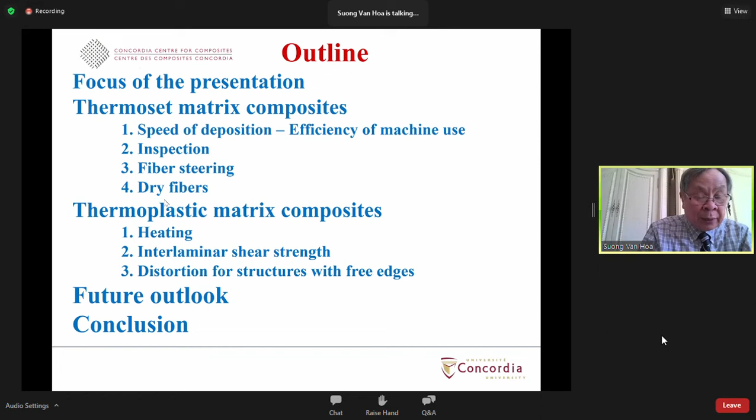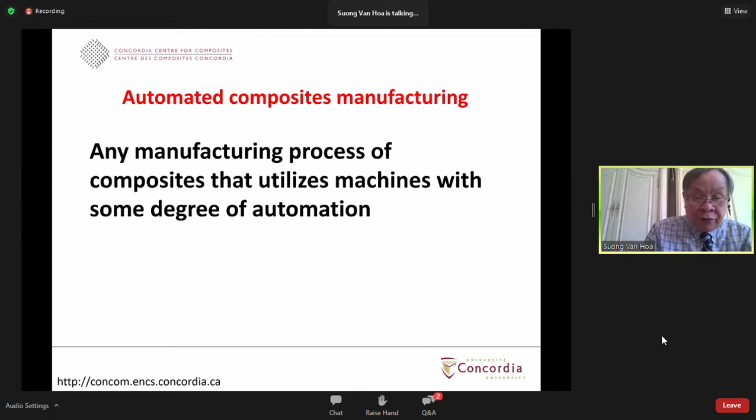So first is the focus of the presentation. To define the focus, what I need to do is define what it means by automated composite manufacturing. In my opinion, any manufacturing process that utilizes machines with some degree of automation can qualify as automated composite manufacturing. The reason I need to do this is because when organizing previous symposia on automated composite manufacturing, I had to decide which abstracts should be accepted, because some people claim they are doing automated composite manufacturing when they may not be. So with this definition, I think the field is very large.

So I want to qualify some aspects that I will not cover in this presentation. The first item is filament winding. I think filament winding is definitely an automated composite manufacturing process. It is an additive manufacturing process as well, and actually some of the AFP and ATL processes were based on filament winding. There's been a lot of literature and information on this technology, so I will not discuss it in detail today.

Another process that also qualifies as automated composite manufacturing is pultrusion. Pultrusion can be used to manufacture many components with uniform cross-section effectively and economically. Again, this technology has been around for many years and there's a lot of information about it, so I will not include this in detail today.

Another process that qualifies as automated composite manufacturing is thermostamping. Thermostamping is similar to compression molding, except the temperature of the panel may not be as high. People use this technique to make small components with complex geometries out of thermoplastic composite fairly well. But again, due to lack of time, I will not discuss this topic in detail today.

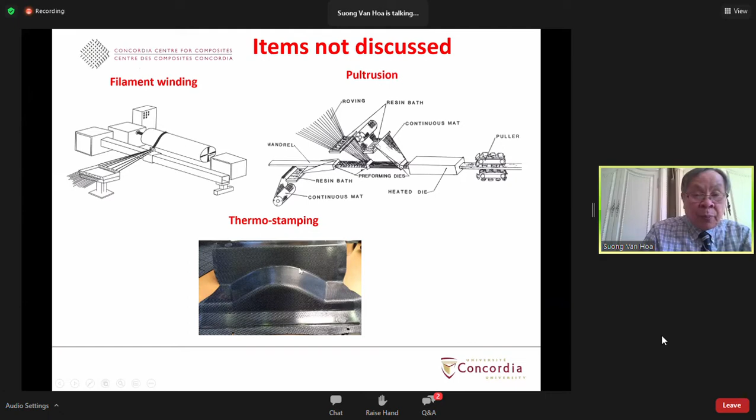Another topic of importance that qualifies as automated composite manufacturing is material handling, pick and place. I think the presentation by Sue Patrick earlier today mentioned quite a bit of this technique - some kind of robot with actuators, and at the end of the actuator you have some kind of suction cup. They use the suction cup with the actuator to place against some kind of prepreg or material and pick it up, transferring it from one table to another, such as from a layup table to a mold surface. This is useful to transfer prepreg, dry fibers, auxiliary materials, bagging material, etc. It's a very powerful technique for transferring materials. I don't have time to go over it in detail, but there's a review paper from 2018 that addressed this technology, so for people interested, you can take a look at that review paper.

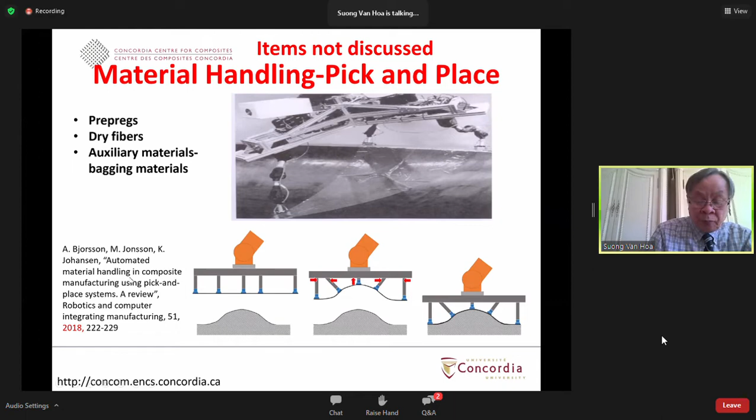So what will I focus on? I will focus on 2 technologies - ATL, automated tape layup, and automated tape placement or automated fiber placement, AFP. The reason I want to focus on this is because these are new technologies that have been used quite a lot in the aerospace industry to make many components for airplanes. Along this line, I will talk about 2 aspects, the 2 kinds of material these 2 processes handle.

One is thermoset matrix composite. For thermoset matrix composite, we have not done a lot of work at Concordia, so I may obtain information mainly from the literature for this particular aspect. The other is thermoplastic composite, where we have done some amount of work. I will talk more about our work on thermoplastic composite using AFP later on.

So the idea for the factory of the aircraft in the future. I show you two pictures. One on the left shows the conventional way of making aircraft components using composite, mainly by hand layup with a lot of people around. The other picture, on the right, shows an automotive application with a lot of robots. So we may think that in the future, the manufacturer of aircraft may look something like the case of the automobile. Maybe—we don't know yet.

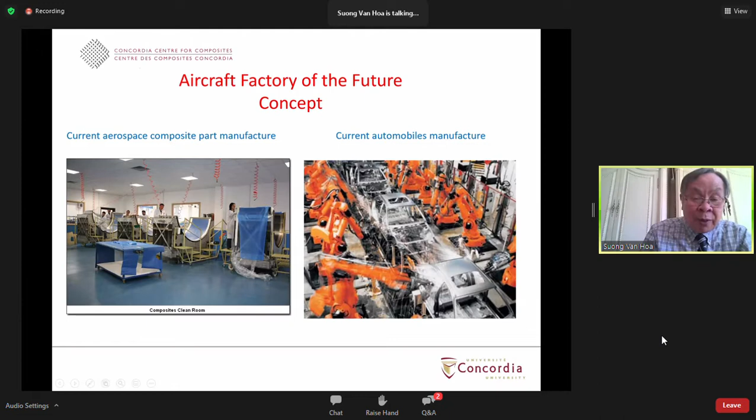But at the present time, in terms of how AFP and ATL are used, they're mainly used for making large, simple structures. The objective of automation for composite manufacturing is how to deposit materials at high speed with good accuracy and few defects. So three main items: high speed—you need to deposit a large amount of material within a certain time—precision, and few defects.

You can take a look here: this gantry is depositing this kind of laminate onto this kind of mold, and you can see this laminate is huge. You can compare it against the size of a person to see how huge that is. The reason for that is because in order to deposit material at high speed, you can mainly work on large parts and also limited geometry complexity.

So for this, I find that thermoset composite is more suitable for this kind of process than thermoplastic composite. I think there were a few questions in the previous presentation about thermoplastic composite—I feel that thermoset composite is more suitable, and I'll mention the reason for that a bit later on.

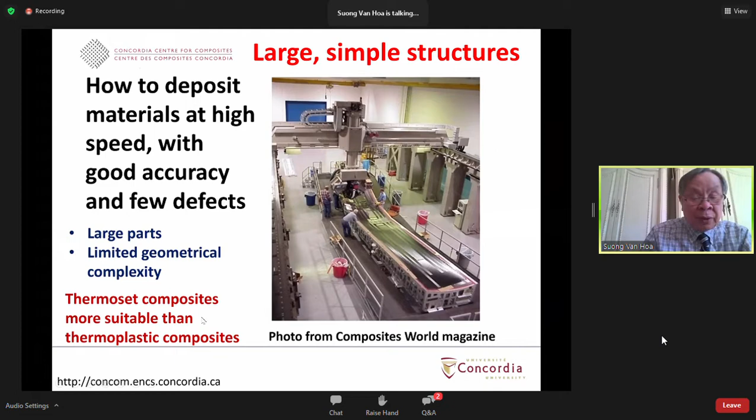Now we look into the use of automation for thermoset matrix composite. The main concern when we lay down the layers is for them to stick together—when you lay down a lot of prepregs, you need them to stick together. The temperature needed is not too high, maybe between 40 to 60 degrees centigrade, and the objective is mainly to make sure it's tacky, so it can stick together and become one single piece.

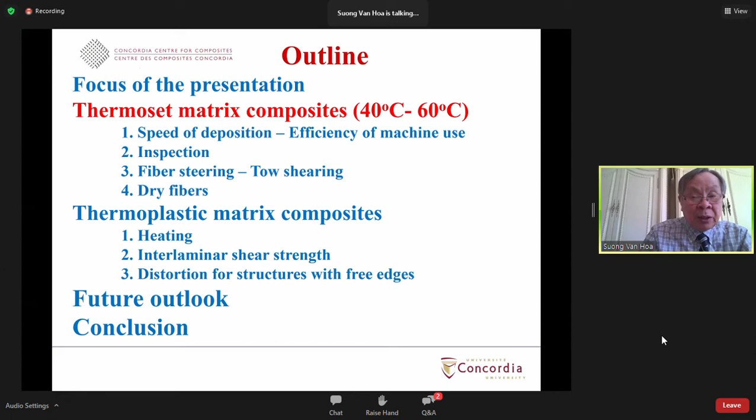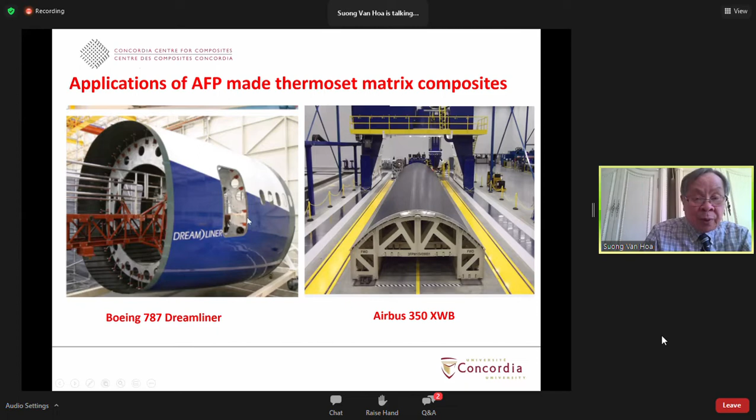Along this line, I think thermoset matrix composite has established a foothold to be accepted in the aerospace industry. Many major companies such as Boeing and Airbus have used automation to make many large structures. I'm sure everybody has seen these pictures of making the fuselage, either for the Boeing 787 or Airbus 350.

So what are the issues right now in terms of improving the use of automation for thermoset matrix composite? We're going to find there are a few aspects: the speed of deposition, efficiency of machine use, inspection, fiber steering, and dry fibers. First, the speed of deposition and effective machine use.

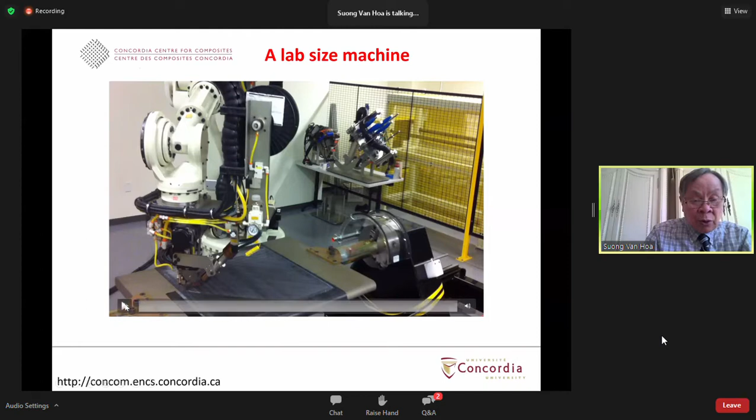First, I want to show you just a lab-scale machine. This is the lab-scale machine we have at Concordia. I'll show you quickly the kind of motion taking place. This is a lab-size machine, but there's a big difference compared to a production machine. I mentioned before that the production machine in real aircraft manufacturing is very large. So when we work with the lab-scale machine, we may not see issues that people in the production area may see, because there the objective is to deposit things very quickly.

There are many items that people spend time studying. Basically, they do some kind of time-motion analysis of the machine, to see what aspects take a certain amount of time. So one aspect is loading the tow—if you have a machine with 32 heads, you spend time loading the tows on, so that takes some time. The next aspect is the different modes of material deposition.

During the time you deposit the material, it depends on whether you have a continuous course, where the machine runs at high speed, called the mid-course payout. Or you have some location where you have to slow down, add or cut the tows, or you have a small piece with a gap.

Another motion here is called the off-part motion. That means the machine has to go back from the beginning to lay down again, so it gets off away from the surface of the part. So that's an off-part motion.

Another activity of the machine is called reliability recovery. During the deposition process, there are many issues like splicing the tow ends - when you're at the end of a creel of fiber, you have to connect the two ends together, spending time to splice them. Or if the tows are broken, twisted, or sticking to the roller, you again have to spend time to repair it.

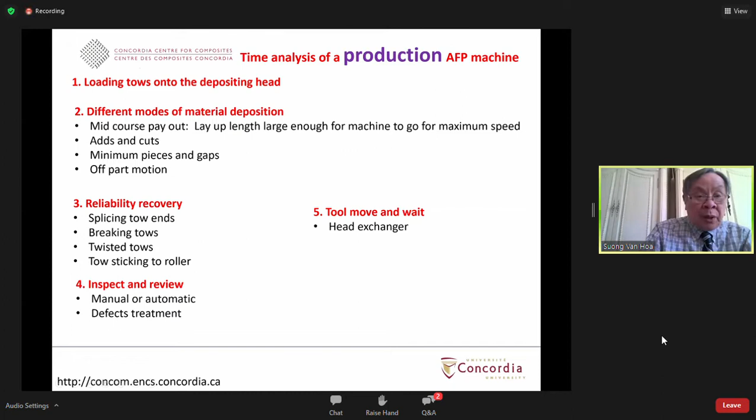There was a paper in 2019 from people at Electroimpact Company, and they make a statement I find kind of provocative: AFP machines in aerospace manufacturing spend much of their existence doing nothing. That's a very provocative statement. Now these machines are very expensive, tens of millions of dollars. It would be a crime to say the machines sit there doing nothing. So what is the reason they say that?

The reason is because they analyzed the different kinds of time and motion I mentioned in the previous slide. They found that in the previous way, the layup time - the real production time when the machine lays down material - only accounts for 19% of the total time the machine spends in a production cell. So what happened to the other time?

The inspect and review time is 42% of the time. That means before, they had to do that manually - get an operator to go and look at every part. So it becomes very fast to deposit, but it takes a long time to inspect. That is not very good.

You also have reliability recovery at 14% of the time, tool move and wait at 17%, and operator breaks at 8%. People have improved this with current technology by 2019 - the layup time increased to 42%, inspect and review went down to 28%, and the other three aspects remained the same. Hopefully in the future they want to improve the layup time to 76%, with the other times remaining similarly.

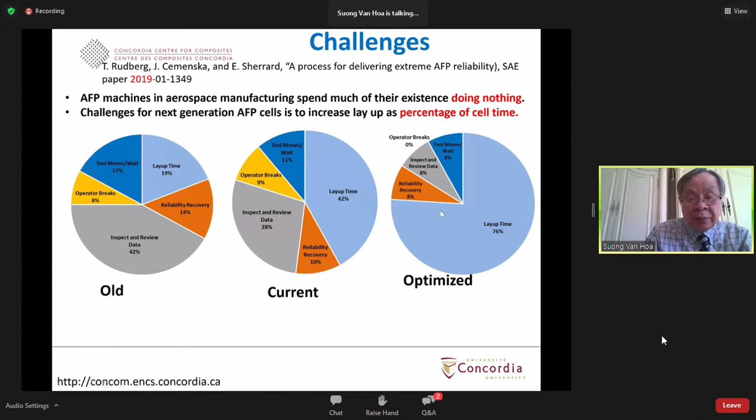This slide here, again from Electroimpact in 2017, gives some of the speed and position of the head. This is the head from Electroimpact, and in this case it has 20 tows, 1.5 inches wide, so each time it can lay down 30 inches wide of material.

They lay down on a large surface with low contours, with four heads. The maximum speed that can be laid down is 4,000 inches per minute, equivalent to 6 kilometers per hour, corresponding to more than 3,000 pounds per hour of material deposited. That is a fast speed.

If you have to add and cut, it goes down to 1,200 inches per minute, and the minimum gap is 600. Off-part motion is 6,000. So out of all these different times, the average amount of material deposited is about 900 pounds per hour.

So that shows the kind of the speed of material deposition.

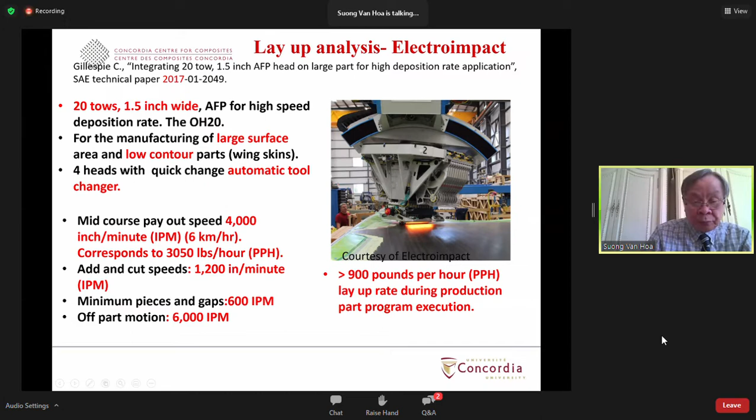The next aspect here is inspection, that means how much time do you have to spend to inspect. In the past, a lot of AFP inspection was done manually, and that consumed a large amount of time, and sometimes you may miss defects. The time can be more than 25% of the total time, and defects may escape detection.

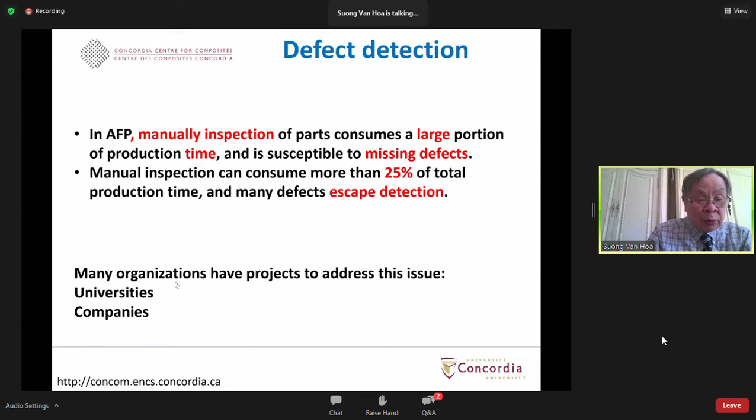Over the past few years, there have been quite a bit of activities addressing this issue, including universities and companies looking into this aspect.

In 2016, there was a paper presented by people in Germany, and they developed a system called thermographic system. They used an infrared camera to observe the surface of the ply that has just been deposited. By doing this, they can detect tow location, gaps, laps, and foreign bodies.

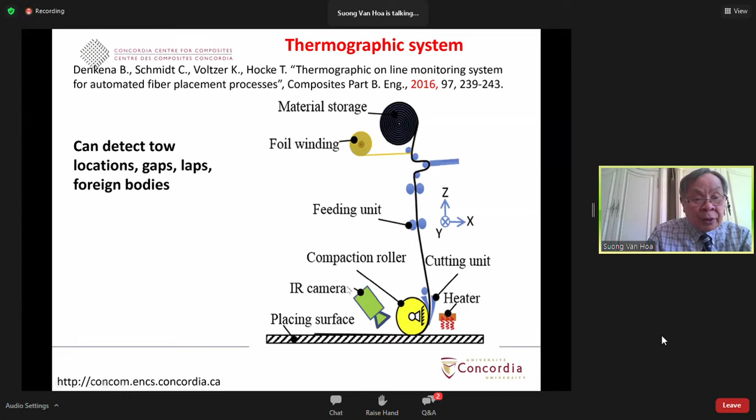In 2019, there was a publication from the National Research Council of Canada. They worked together with Fives Machining system and developed a system called optical coherence tomography. This is similar to ultrasound imaging, where they use light to detect over the surface. By making a scan over the surface of the laminate, they are able to see some kind of deviation whenever you have something like a tow splice or a tow wrinkle.

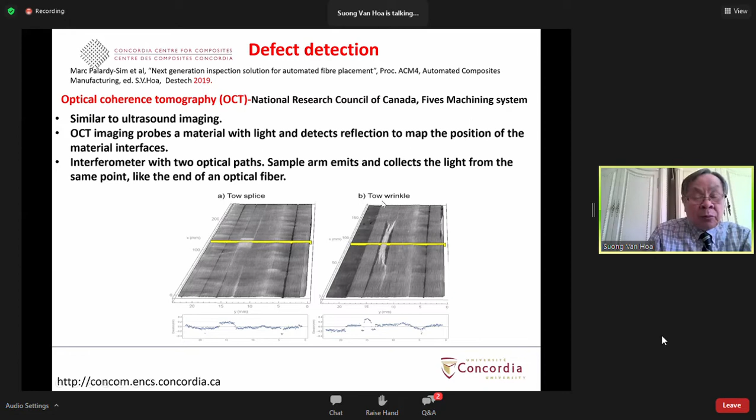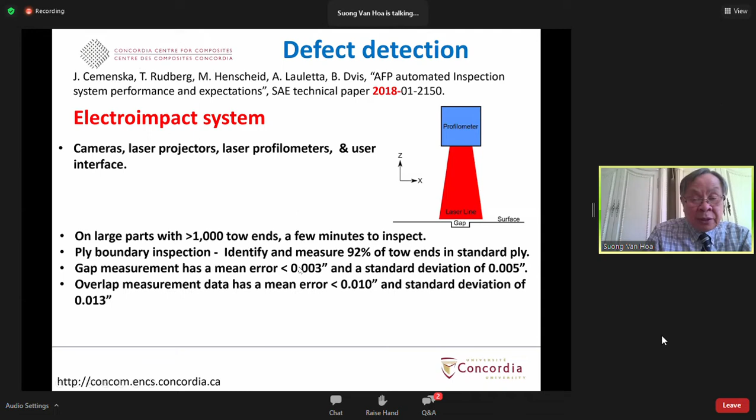From the industrial side, again from the Electroimpact people, in a 2018 publication they developed a system where they use a laser profilometer, projecting a laser line on the surface of the substrate. With this, they were able to detect more than 1,000 tow ends in a few minutes, and identified 92% of the tow ends in the standard ply. This system was able to detect the presence of defects effectively within a short time.

Now, for this kind of inspection system, there is a need for software programs. There's a lot of information that is generated, and you need software to handle the data. The data can approach more than 1 terabyte per part, for a complex part, so there's a huge amount of data that has to be processed.

However, it can reduce inspection time and reduce human error. Besides that, they can also have some kind of statistical process control to eliminate unnecessary fixes. There may be some defects that are not critical and you may neglect them, or there may be something more severe that you have to work on.

However, this machine is not cheap, it costs more than $1 million. Besides that, the manufacturer needs to make decisions about what to do with the inspection data. After you have seen the data, you have to decide what to do with it. If the defect is not severe, you can live with it and move on. If the defect is significant, you have to repair it. And if it's too critical, you may have to reject the part.

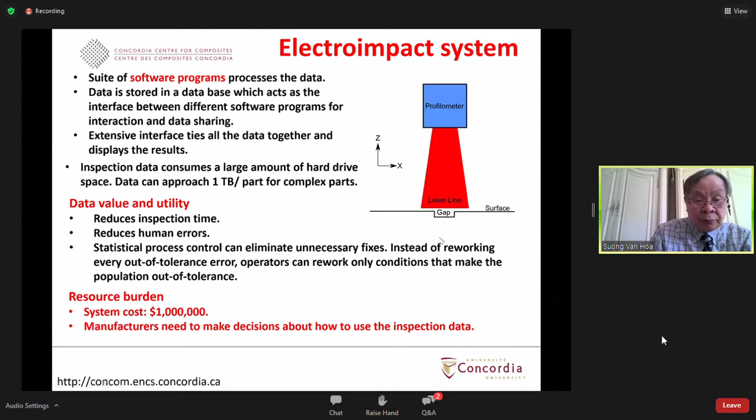Last year, there was a publication from people at the University of South Carolina, and they identified 14 different kinds of defects inside the laminate made using AFP: gap, overlap, pucker, wrinkle, bridging, boundary coverage, angle deviation, fold, twist, wandering tow, loose tow, missing tow, splice, position error, and foreign object.

They also classified the defects based on 5 perspectives. The first is anticipation, meaning the way you can predict the defect based on the computer-generated fiber path. Because in automation, you have some kind of computer to generate the fiber path, and you know where the fiber is, so depending on the fiber path and the relative geometry of the part, you can predict whether there will be some defect at a certain location or not.

The second perspective is existence, meaning whether your inspection system can detect it using some system.

The third one is significance, meaning what is the effect of the presence of the defect on the performance of the part, whether that's critical or not. The fourth one is progression, whether the defect will grow during the process. And the fifth one is disposition, what to do with the defect, whether it is critical or not critical, and you have to make a decision on that.

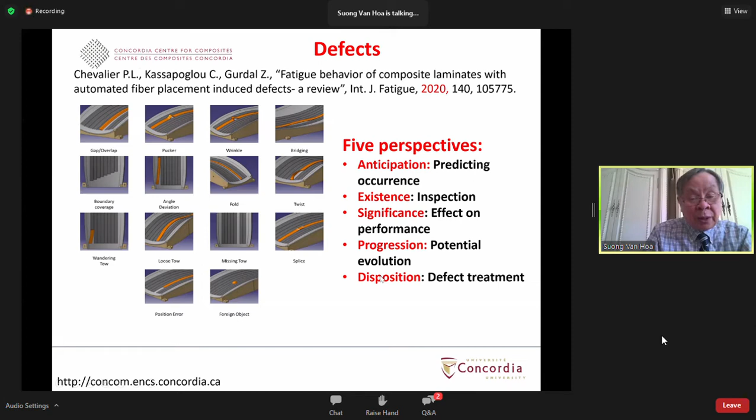They also made a survey of the work done on the effect of defects on performance. A large number of papers have been published on this. From the survey, they found that for quasi-static loading in unnotched unidirectional laminates, the effect is not significant, probably less than 10%.

However, the effect is more severe in fatigue loading, where the effect of defects can be up to about 30%. They also mentioned that due to the large number of defects and different geometry configurations and layers, the work done so far has only looked at very limited configurations, and a lot more work needs to be done before we can really understand the effect of defects.

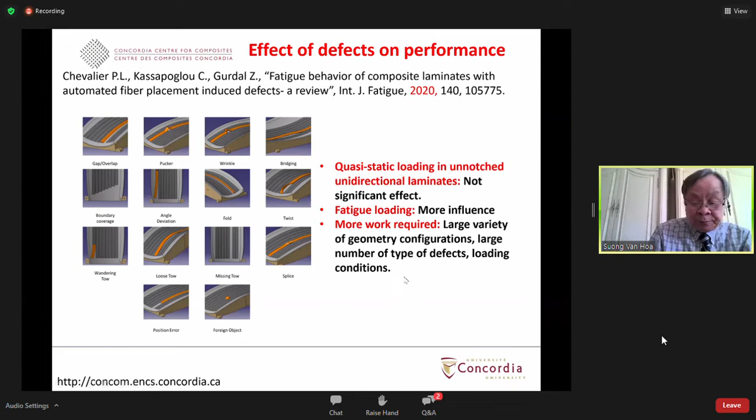The next aspect concerning AFP is fiber steering. One nice feature of automated fiber placement is that you can steer the fiber. There was also work done at Bristol some time ago about tow shearing, a similar aspect to match fiber that is curvilinear.

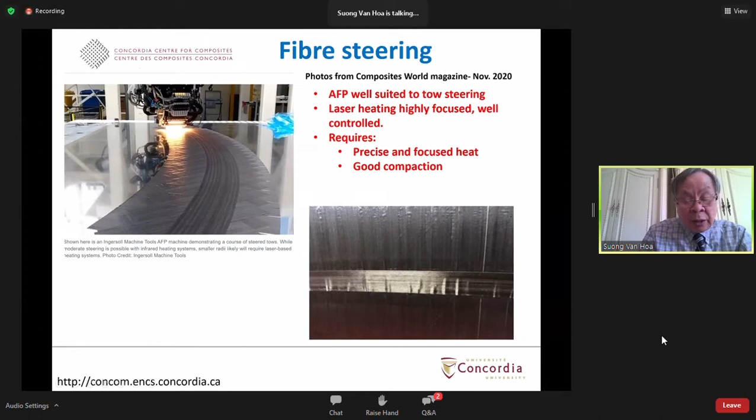However, there is a minimum limit radius that you can steer, because if you steer below the minimum radius, you get defects such as buckling, wrinkling, and so on. To improve this, you need precise and focused heat and good compaction pressure to control this aspect. People found that laser heating is a better way of heating because it has more focus and good control.

There are many factors affecting the steering radius: tow width, tow thickness, resin type, resin tackiness, fiber type, fiber format, substrate contour complexity, substrate quality, arc length, and tolerance parameters.

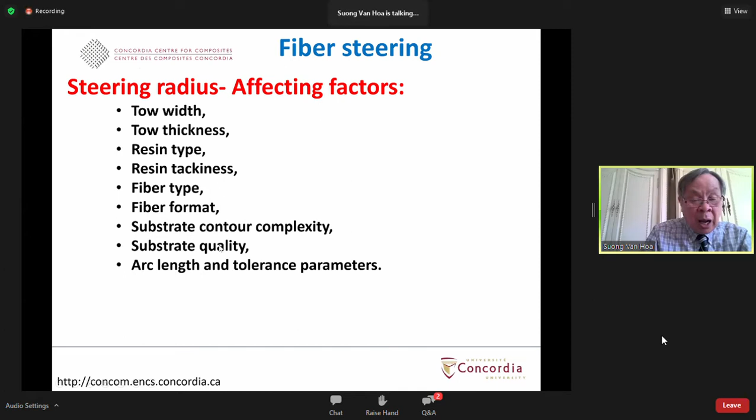From publications by a few companies, Electroimpact, Coriolis, and Ingersoll machines, they found these minimum radii that you can steer a tow. For an eighth inch tow, the radius is 19.5 inches; for another quarter inch tow, between 11 and 59 inches; for a half inch tow, 6 inches.

However, there was a statement from a company publication that I find interesting. It says such steering sees limited use, given the fact that composite aerostructures operate in a certification environment that favors traditional quasi-isotropic ply schedules. So this says that at present the industry may not be using it yet. However, I think the work done, mainly academic, will be useful in the future and also for other applications.

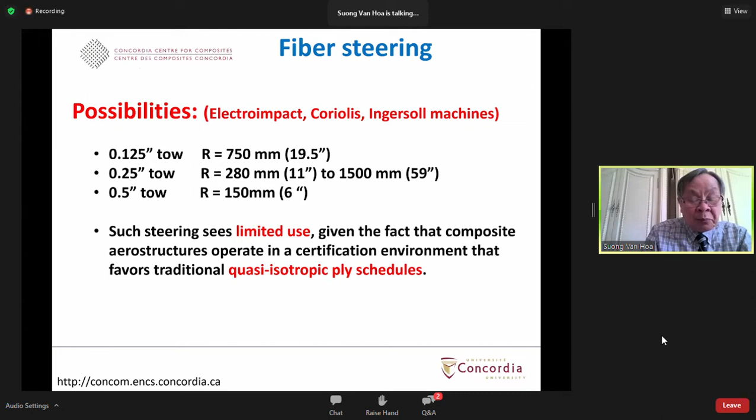Now the last thing I will talk about for thermoset composites is dry fibers. I put dry fiber within thermoset composite because when we automate making dry fiber, we only make the preform. After you have the preform, you need to infuse resin into it to make the composite, normally using a thermoset matrix. For dry fibers, you normally have to use some kind of thermoplastic binder, and during the process, the thermoplastic binder needs to be melted so you can free the fiber.

As such, you need a good amount of heat. The temperature is between 160 to 200 degrees centigrade to process it.

So the advantages and disadvantages of dry fiber: because there's no resin, downtime, event, and repair times are less for DFP versus AFP processing. People feel they can increase machine utilization from 15 to 30%. Also, the fiber has better tension control, so the speed can be larger. People usually use laser-focused heating on the active tows.

However, there are disadvantages, including the development of fuzz from the fibers because they are dry, which can result in foreign object debris creation on the laminate. It also requires higher temperature heating and finer tension control, and because of this higher temperature, you have to use a strong laser. A strong laser requires safety measures because it can be dangerous if it hits somebody. Also, the laminate has lower tacking, which makes the part more fragile and creates challenges for thicker layups.

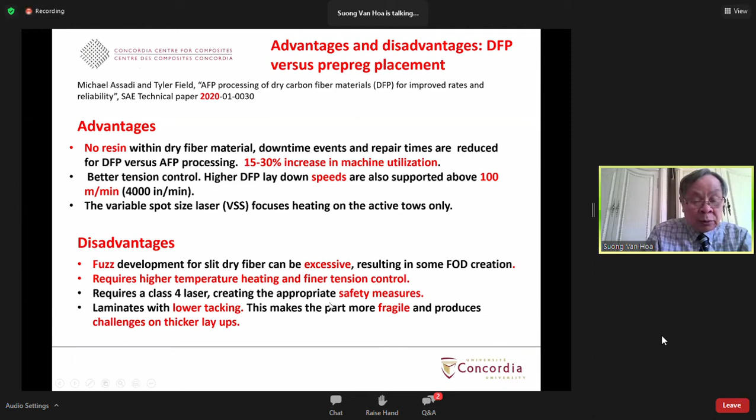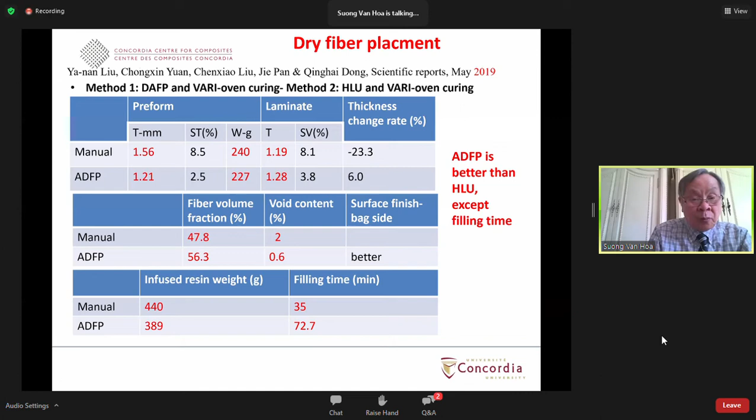Next, I talked about the use of AFP to make thermoplastic composite. Thermoplastic composite depends on the kind of resin because of the high viscosity, so you need to really heat it up to high temperature in order to reduce viscosity. Depending on the kind of matrix that you have, whether PEI, PPS, or PEEK, the process temperature can vary between 275 to 400 degrees centigrade.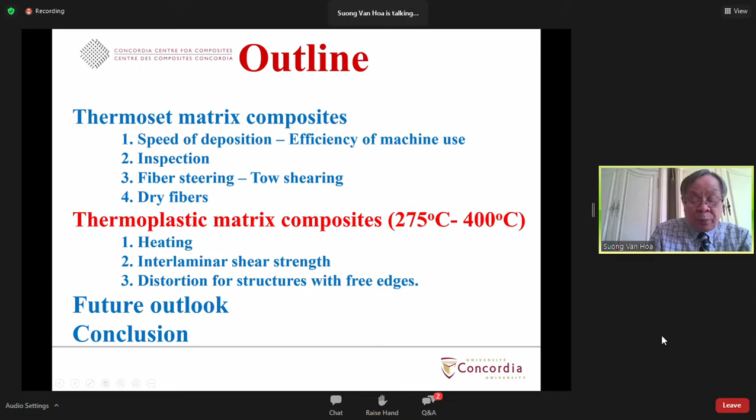Thermoplastic composite certainly has more issues than the case of thermoset. Usually the objective in manufacturing thermoplastic composite using AFP structure is to have minimum amount of void, a good degree of crystallinity for the resin, no deconsolidation, no distortion, good rate of production, and good surface finish. Again, there are many issues.

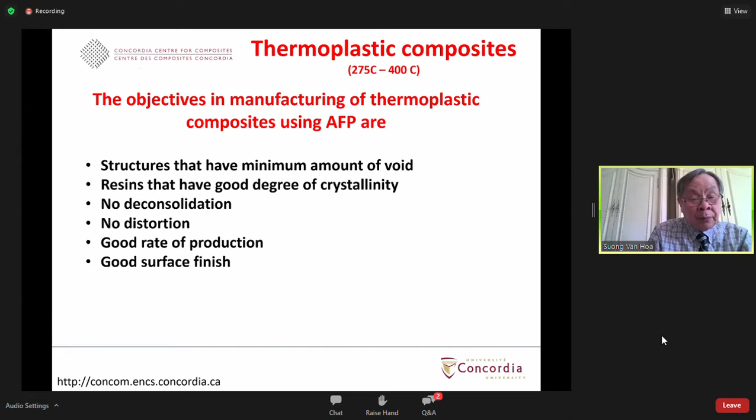The first issue is heating, the heat sources. The heat source for the case of thermoplastic composite has to be stronger than in the case of thermoset, because you have to melt the resin due to the high viscosity.

There are 5 different kinds of heat sources for thermoplastic composite. First, hot gas torch, which has been around for some time, using nitrogen as a way to heat. Direct open flame torch. Third is laser, which I think more people use these days. Recently, over the last few years, they have the heat lamp. And infrared has been around, but it's not as strong compared to the other 4 kinds of heat sources.

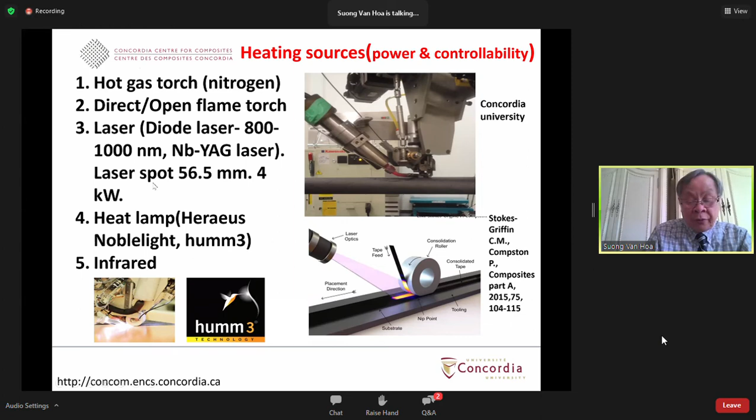In more detail, we have the direct hot gas torch. Here nitrogen gas is heated by an electric heater located before the tip of the nozzle, and the nitrogen flow can be adjusted. However, the disadvantage is that the hot gas stream cannot be pointed in multiple directions efficiently, and there is heat loss to the environment.

Direct flame is similar to the hot gas torch, except they use propane gas and oxygen, and the ratio can be adjusted. But it has a similar disadvantage to the hot gas torch: the flame cannot be pointed in multiple directions efficiently, and there is heat loss to the environment.

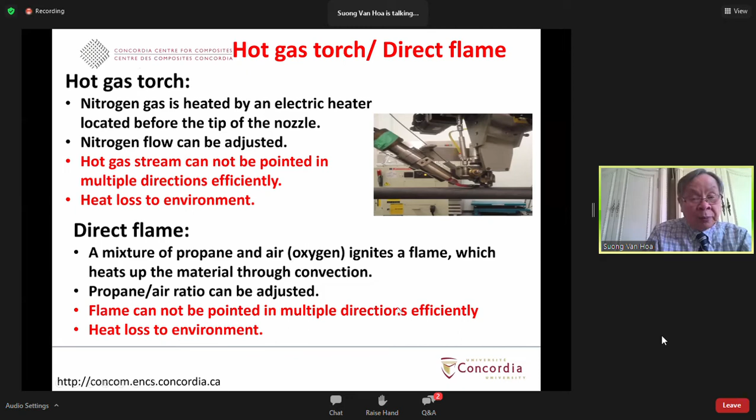Laser - quite a few machines these days use laser. The power of the laser can vary anywhere between 3 kilowatt to 5 kilowatt diode laser. The wavelength is about 1,000 nanometer. The speed can be fast, from 8 meter per minute to 12 meter per minute. One of the advantages of the laser is that they can use a soft roller.

That is a roller made of silicone. Using a soft roller like silicone allows a larger area of contact between the layers of the composite, and that way you probably tend to have good interlaminar shear strength. However, the disadvantage of the laser is safety considerations, because the heat is strong and you need to make sure it doesn't hit the operator during the process.

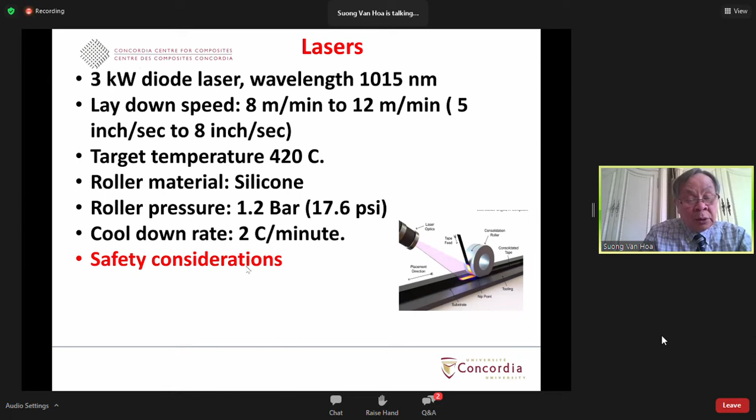Over the last few years, there came the heat lamp, the Humm3. It uses high energy flashes via xenon lamp to heat the material through radiation. The 3 parameters are voltage, frequency, and pulse duration.

The advantage of the heat lamp is that they can direct the heat to different locations: 25% toward the incoming tape, 25% to the nip point, and 50% directly at the substrate. The disadvantage is that it's fairly new, so we need to study and learn more about it.

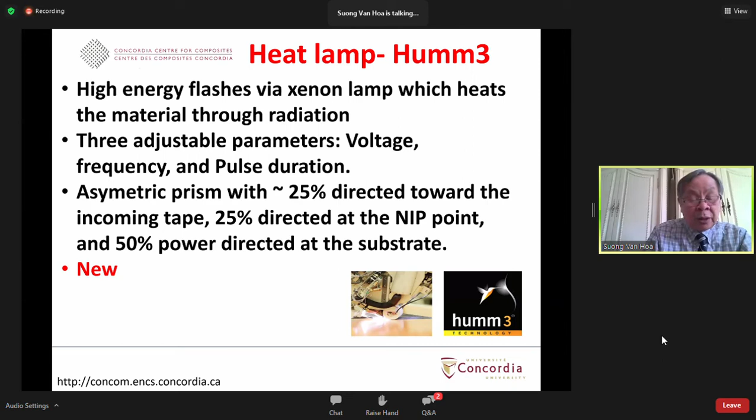Now one of the issues with thermoplastic composite is interlaminar shear strength. What I find is that the interlaminar shear strength of laminate made by thermoplastic composite is not as high compared to that of the autoclave.

In a publication in 2019, there was a comparison of the interlaminar shear strength of laminate made by different kinds of AFP using different kinds of composite, and the value is about 50 MPa, compared to about 80 MPa for autoclave. So that's roughly 60% of the autoclave value.

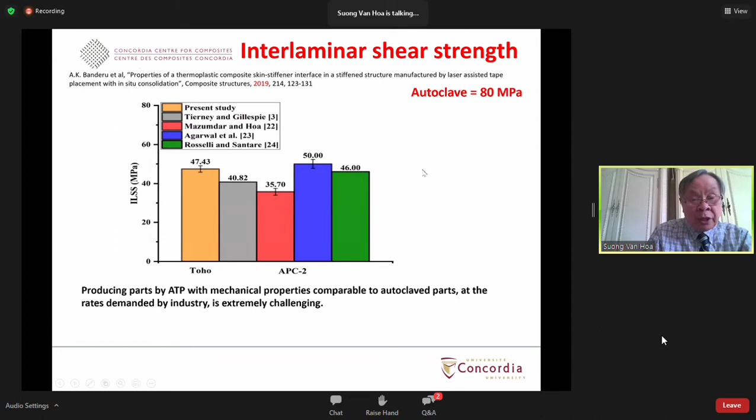There are many reasons why the interlaminar shear strength of thermoplastic composite made by AFP is not as high compared to autoclave. I find there are basically 2 reasons: one is the bond formation, and the second is the deconsolidation after the nip point.

Regarding bond formation, when you look at the AFP process, you have the incoming tape and the substrate that was deposited beforehand. These two have to come together and bond. During this process, you can break it down into many steps.

The first step is that the surface asperities have to be flattened. Between these two surfaces there may be some roughness, and this roughness has to be flattened because it gets melted and flattened.

Then the two surfaces have to get into intimate contact, touching each other. Then the intimate contact has to be long enough so that the molecules of the thermoplastic can diffuse and wrap across the interface to make the bond. There's also some dynamic shear effect that may help reduce the viscosity to do that as well.

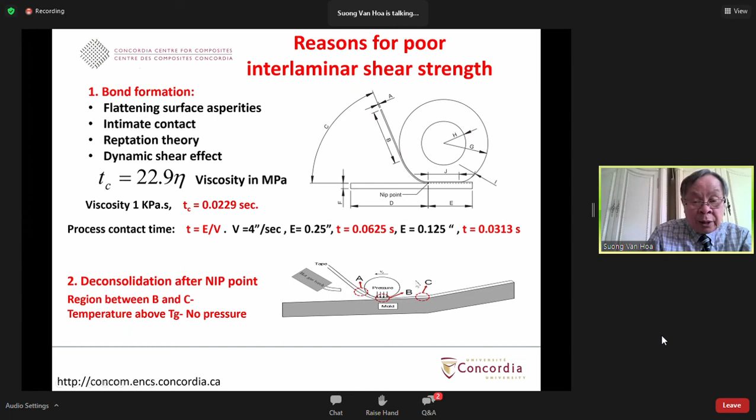Another issue with thermoplastic matrix composite is the distortion of structures with free edges.

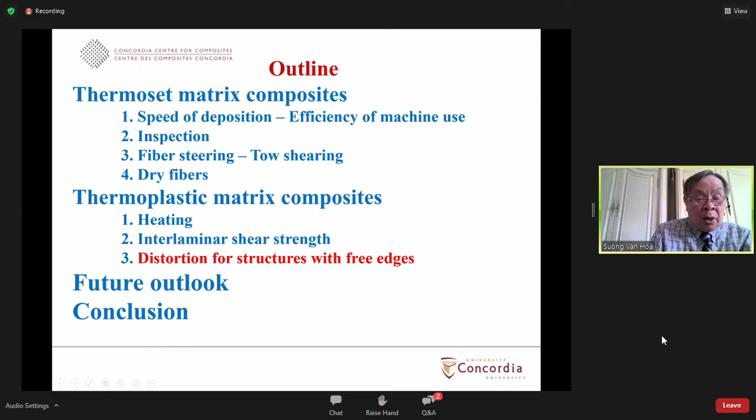Now, we identified two kinds of structure. One is structure without free edge, such as the case of a cylinder like this. For this cylinder without free edge, it's no problem. We were able to make them very well, no issues.

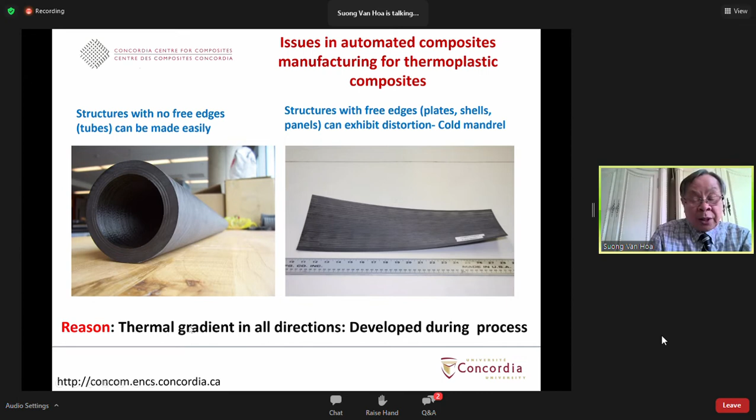However, for the structure with free edges, that means you have something like a flat plate, or the case where you have a curved panel where the fiber is cut. What we find is that right after the process, you have distortion, even for the case of a unidirectional layer. Now, the reason for this is because of the thermal gradient, the fact that the temperature varies throughout the space in X, Y, Z direction, in all directions. And this developed during the process, so right after you make it, you also have this kind of situation.

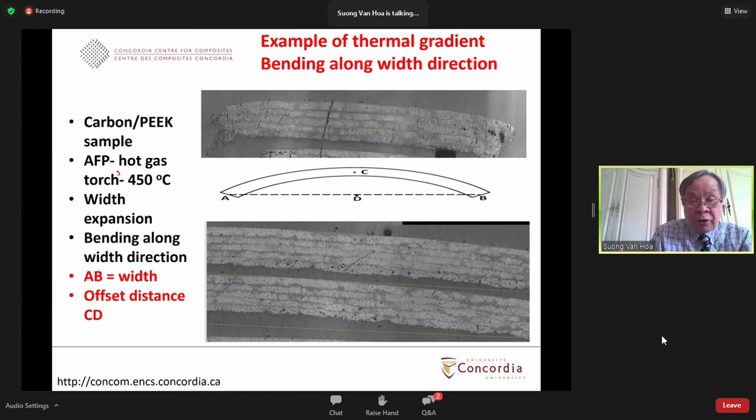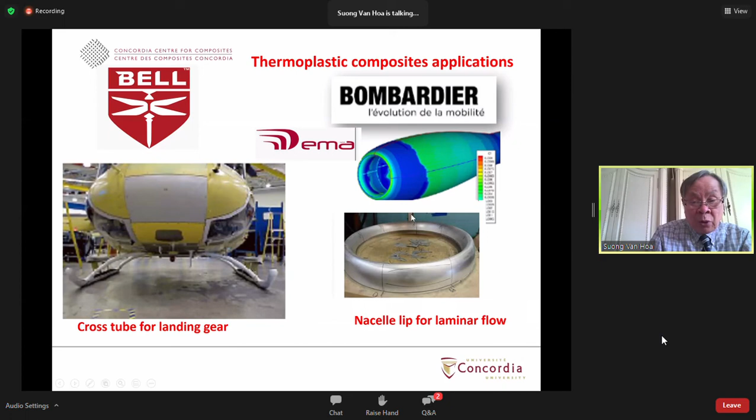For the case of the cross piece for the landing gear, right now it's made of aluminum, and people want to replace aluminum for many reasons. The requirement is that it had to be stiff and strong, but also the challenge is how to absorb a large amount of energy on failure. We know composites are stiff and strong, that's fine, but composites usually tend to be brittle. So how do you make sure it can absorb a large amount of energy before failure?

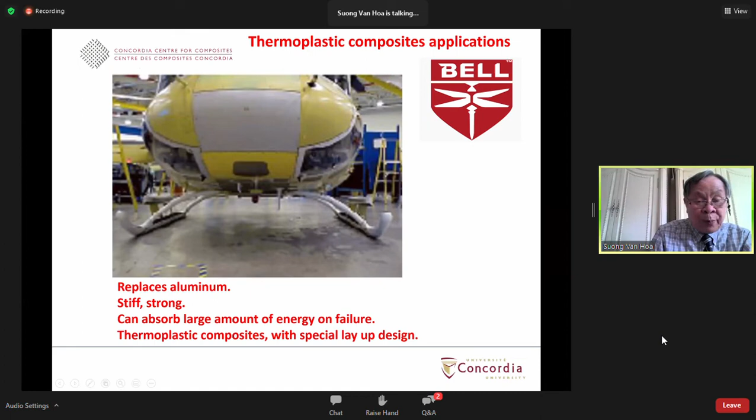So here we use thermoplastic composite because it tends to be better than thermoset in terms of energy absorption. We also have to design the special layup in such a way that you can really achieve a large amount of energy absorption.

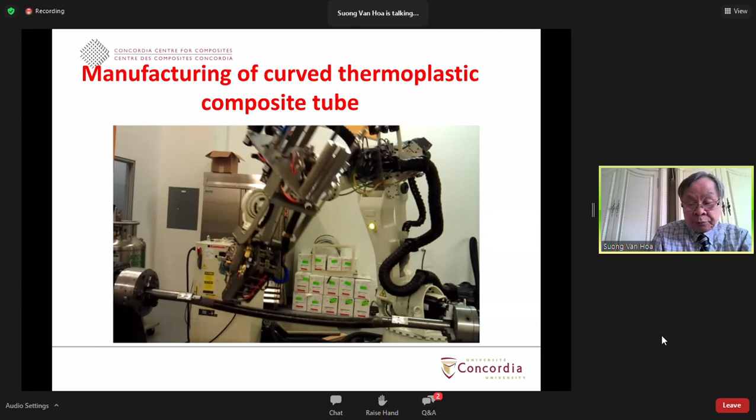This shows a video about the way we program the machine to get the layup along different orientations to do this. In this case, we have made a straight tube, we have also made a curved tube, and we have a setup that can do bending, either 2-point or 3-point bending, on a straight tube or on a curved tube.

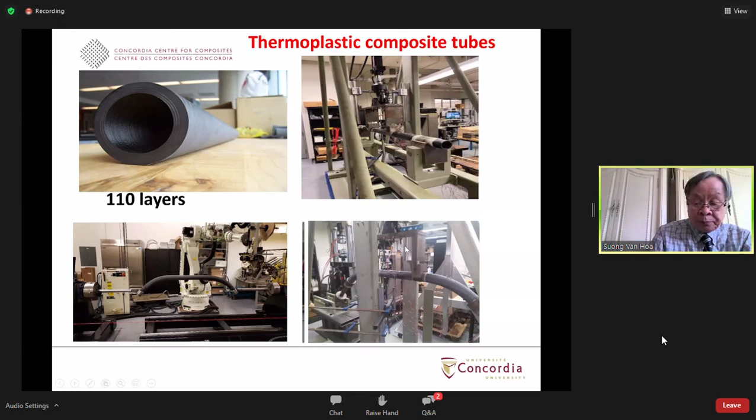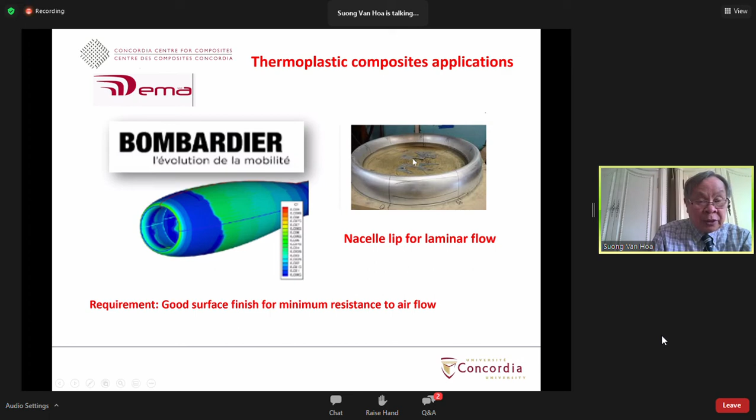Now, the work on the nacelle lip for laminar flow for Bombardier and Dema. Apart from the fact that we need to be able to machine and manufacture to the shape, the other aspect is that it had to have a good surface finish. The reason for this is that it had to allow air flow, and they want minimum resistance to air when it flows through, so it had to have a good surface finish.

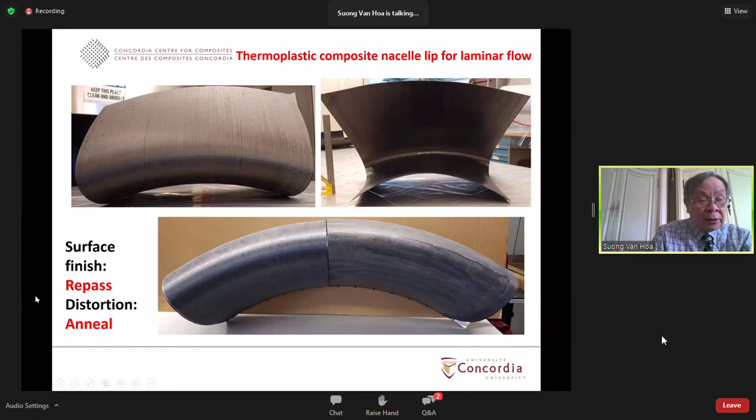So in this case, we have made the pieces, and you can see that the way we address the finish is by using a technique called repass. Repass means that when you finish it, you run the machine over the surface without any deposition. The other aspect you have to address is distortion, and we use an annealing technique to address that.

In terms of repass, that means passing the torch and roller without material deposition. So we show you the measure of roughness, RA. If you make the part without repass, the roughness is about 40 microns. One repass reduces it down to 5, and so on. Compared to autoclave, it's about 1.

Now, along the fiber direction, the roughness before repass is 20. After 1 repass it's 4, 2 repasses it's 3, and that's compared to autoclave. This also shows you the microstructure. What we found is that repass can also help reduce the void content as well.

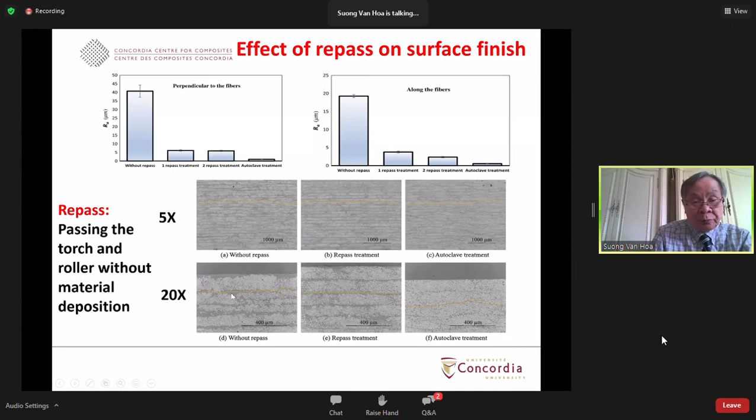So, future outlook in the sense of where we go from here - there are people with certain opinions. One is about collaborative fiber placement, that is, using more than one robot to make a piece. There was a publication from J. Intell. Robot Syst in 2019.

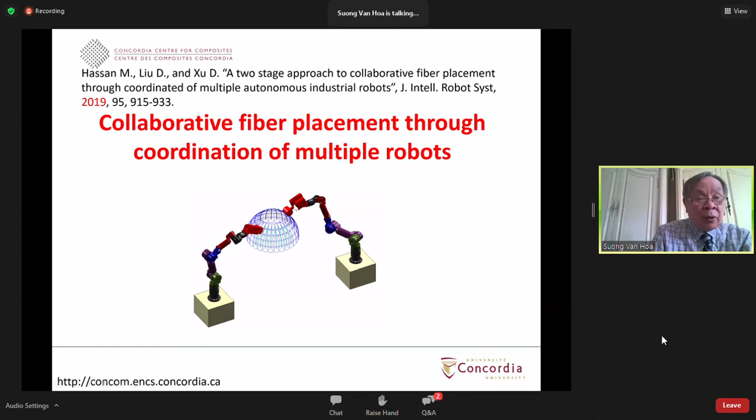They mentioned a system called GroFi from the German Aerospace Center. In this case, they were depositing material onto a vertical mandrel, so the robot is placing material on the vertical mandrel, and you can use more than one robot to do that. Normally they have a cell of 8 robots, split 4 and 4 - so 4 robots are working while 4 are in reserve, with a track to move them in and out.

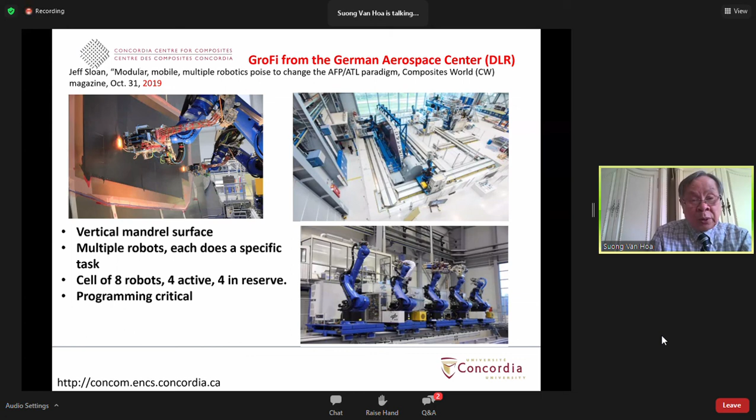So the critical issue here is programming. They have to make sure the program is good so that they avoid collision between the robots, and also ensure that each one of them does a portion of the job.

Now, also the other thing we feel about the future is the limitation in application of ATL and AFP. Certainly ATL and AFP are very good at making large components, however, for small parts such as ribs and brackets, they may not be efficiently used. Also, complex features such as double curvature, tight corners, and steep ramps are challenging. And the capital cost is very high - these machines cost $10 million, and many small and medium companies may not be able to enter into the technology.

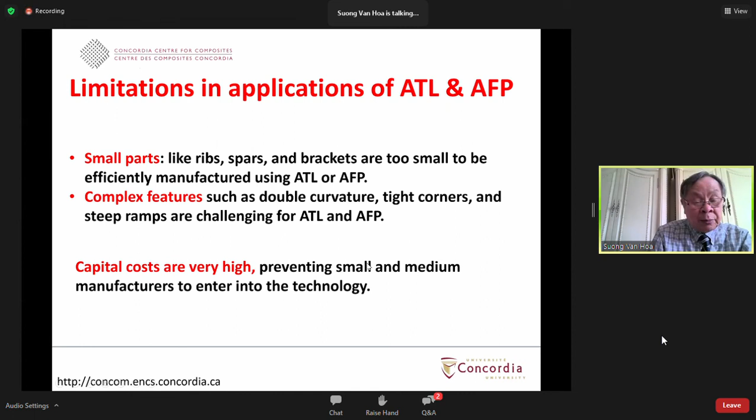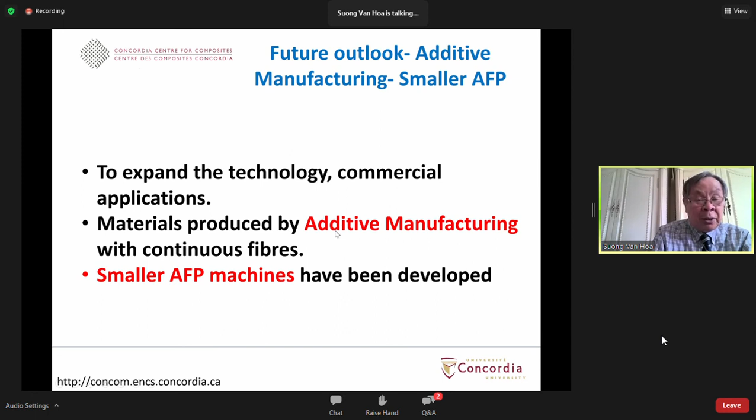So we feel that right now, what may expand the use of automated composite manufacturing is either additive manufacturing or smaller AFP. These are the other ends of the picture. In the case of 3D printing with continuous fibers, you feed in the resin together with the fiber, and right now the Markforged company has 2 models, Mark II and X7. It can handle carbon fiber, natural fiber, and glass fiber.

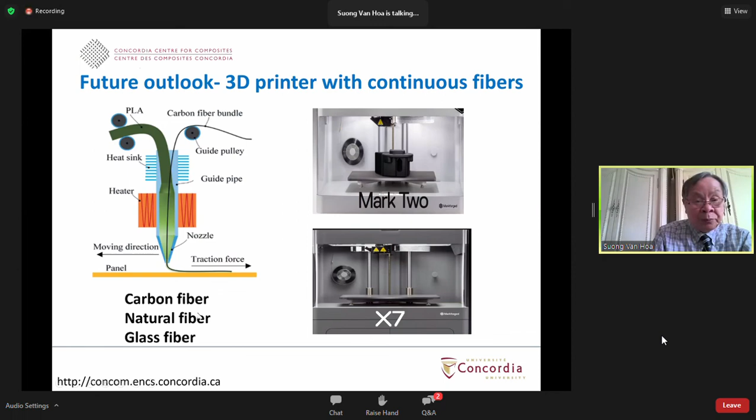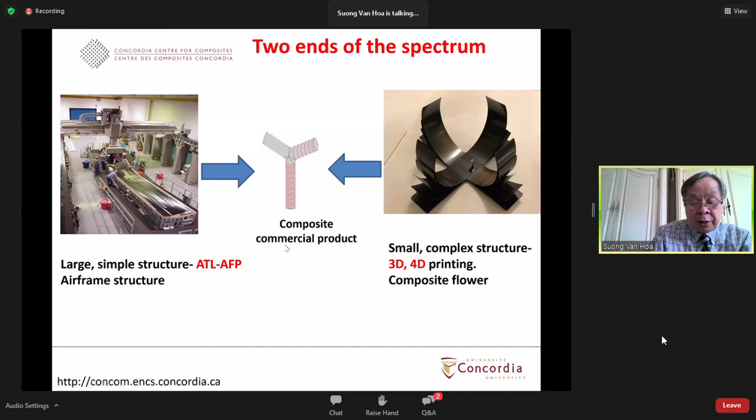So right now we have 2 spectrums: the large machines to handle aircraft manufacturing, and the small pieces made by either 3D or 4D printing, and hopefully in the future we can use this technology to make some kind of commercial products. In terms of small AFP machines, in 2018 there was a company in Finland called Addcomposites that developed a small AFP machine.

The weight is 16.5 kilograms. It can sit on top of a desk. It can handle carbon, natural, and glass fiber, and it can do different tow widths - 1/4, 1/2, and 1 inch.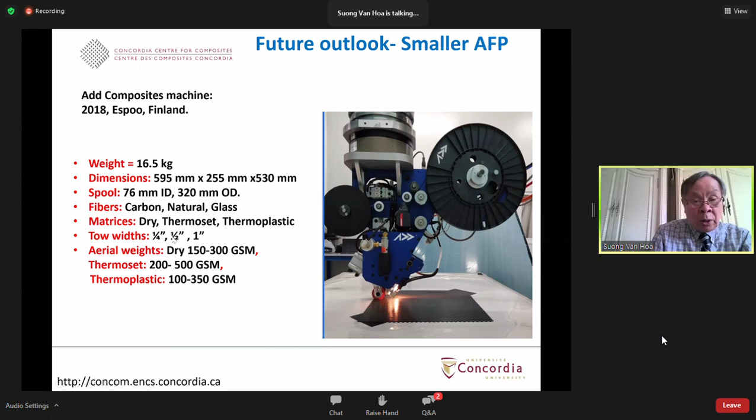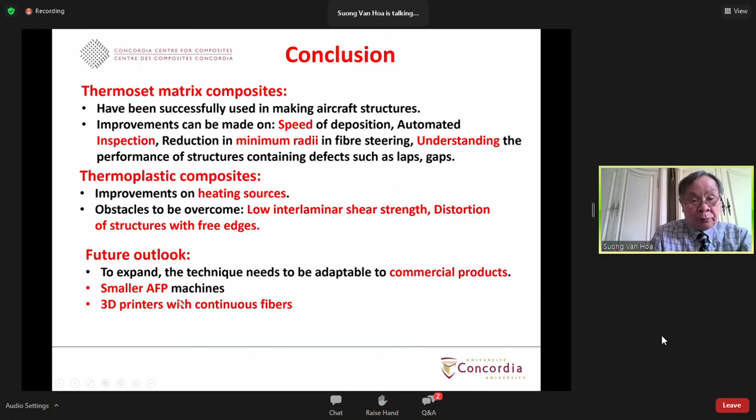And future outlook, in terms of trying to go to commercial products, here will be smaller AFP machines or 3D printers with continuous fibers. I would like to acknowledge the financial support from the Natural Sciences and Engineering Research Council of Canada, Flight, Bombardier, and DEMA.